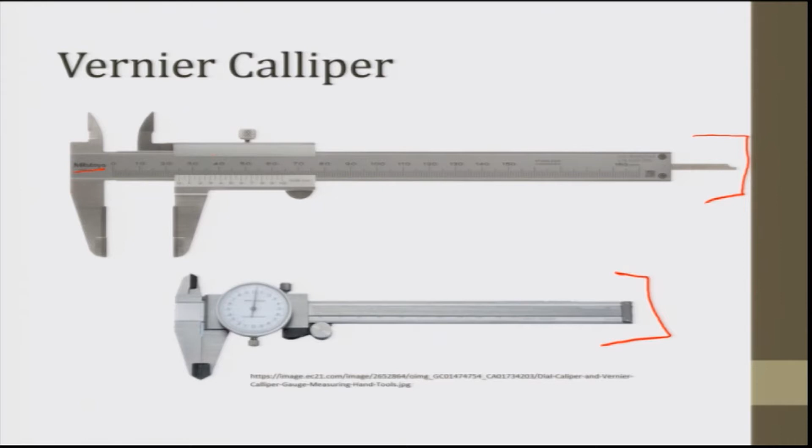The first instrument I will select here is the Vernier Caliper. These are the two Vernier calipers that we will discuss, both manufactured by Mitutoyo, Japan, and they have certain specifications. You can see the instrument here, it has various components.

This instrument has a main scale. The length of the main scale is about 12 inches. You can see it is calibrated up to 200 mm on the main scale. On the lower side it is actually 200 mm, however the length of the scale is even larger, to accommodate the other part, the movable part of the instrument, that we will discuss.

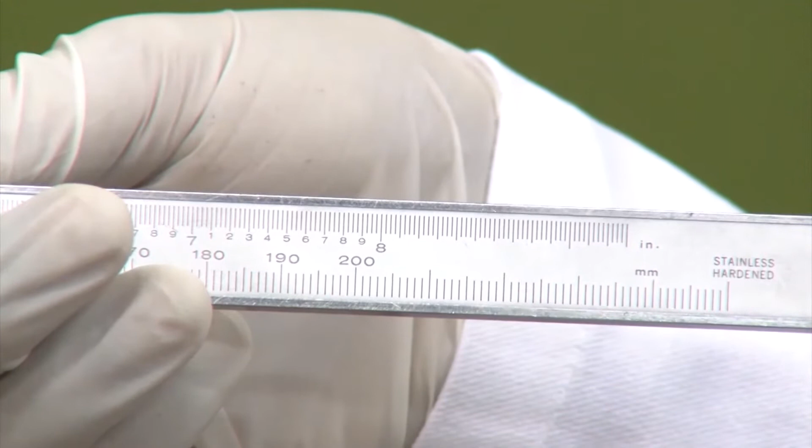On the upper side of the main scale we have the inch scale, calibrated up to 8 inches. However, there are certain other calibration lines that you can see here. The material of this specific Vernier caliper is stainless steel, stainless hardened steel.

It has various components as we have discussed in the theory as well. The first component is the solid L-shaped frame, which is actually fixed. It has two calipers on both sides, and there is another caliper that is movable.

You can see this solid frame here, in which we have two calipers on both sides. Actually there are two jaws. The jaws on the lower side are for the external dia - we can measure the external diameter of cylinders, spheres, or any body using the lower jaws. The upper jaws, which can be inserted into the cylinder, can be used to measure the internal dia.

If we close it completely, you can see the external jaws are also closed and internal jaws are also closed. When we open it a little, you can see these internal jaws on the upper side can be inserted inside, and the external jaws can hold the workpiece from the outside.

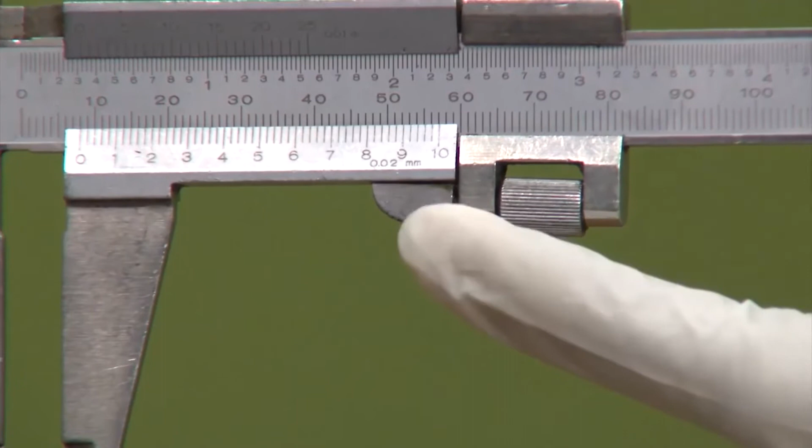So it has screws attached to it. On the lower side we have the fine adjustment screw, and on the upper side we have the clamping screws. How do we operate this? First we tighten the screw which is on the right hand side, and then using the fine adjustment screw we can adjust the distance of the Vernier scale.

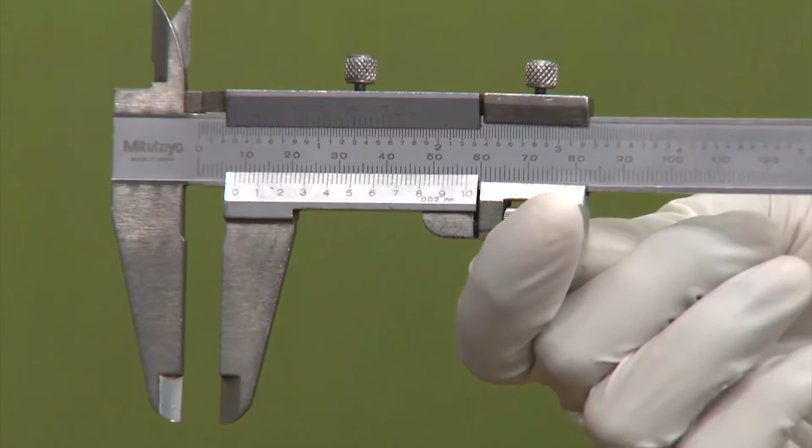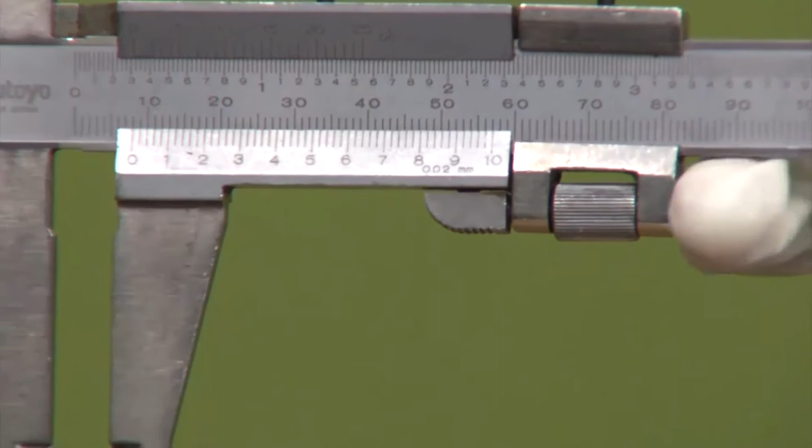The Vernier caliper is made up of either stainless steel or tool steel depending upon the nature and severity of the applications. It has engraved graduations which can be either forward vernier or backward vernier. This specific Vernier caliper that we have in hand is the forward vernier, so the reading starts from 0 to 10. Had it been from 10 to 0, it might be called a backward vernier.

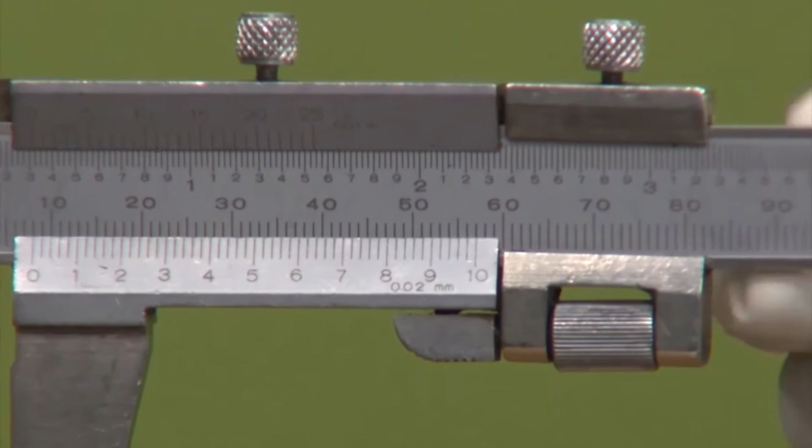The clamping screw enables locking the movable jaw in a particular position after the jaws have been set accurately over the job being measured. This arrests the further motion of the movable jaw. When it is locked using the clamping screw, the operator can note down the reading in a convenient position because the jaws would not move further.

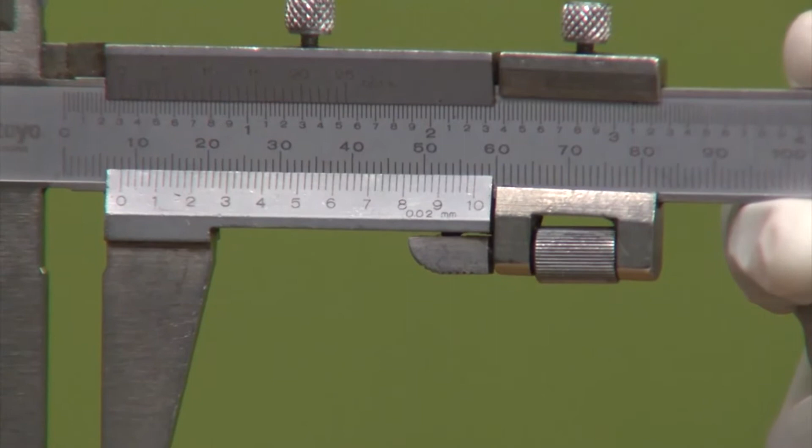The fine adjustment screw enables the operator to accurately enclose the portion of the job where measurement is required, by applying optimum clamping pressure. However, there are certain guidelines before using the vernier caliper. I would like to mention we need to clean the equipment, clean the vernier caliper or any equipment - this is a basic precaution or guideline used with instruments.

This vernier caliper is actually the analog or mechanical vernier caliper. We also have digital vernier calipers where we can adjust the zero at any position. We can say this is the zero position, and the zero can be adjusted because that is a digital scale.

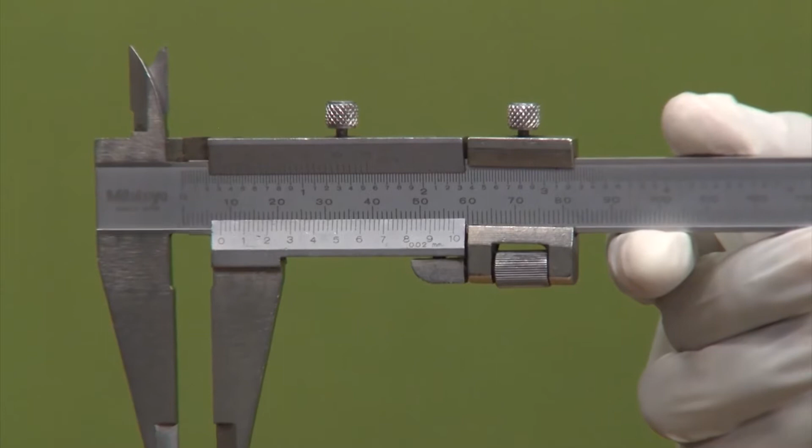But in this vernier caliper, we need to calculate the zero error if it is there. Deterioration happens due to small dust particles or tiny chips which can clog or come in between the rack and pinion arrangement of the vernier caliper, which can hinder it. So it is important to clean it properly.

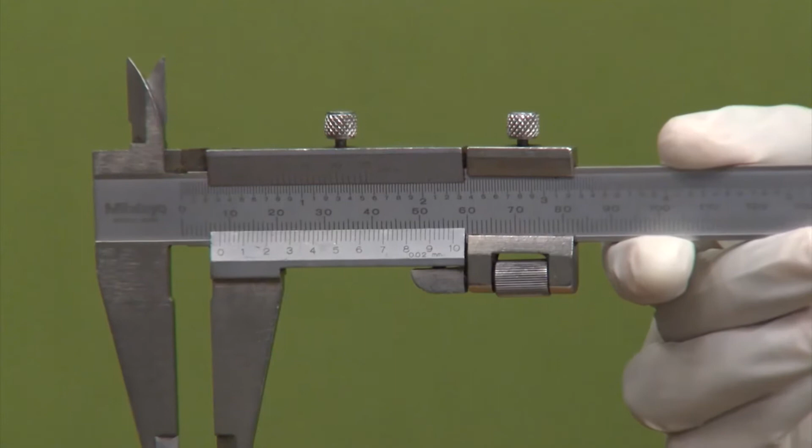The first part is I have to clean the jaws from this part because it is calibrated based upon this surface. This is a flat surface, and the flatness has to be up to approximately zero level. However, there is no actual zero level that exists, so it also has to be cleaned from here. We can use cotton to clean it using acetone.

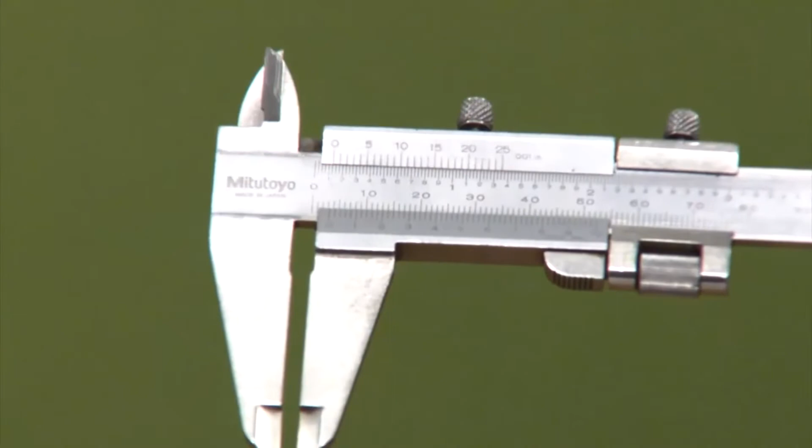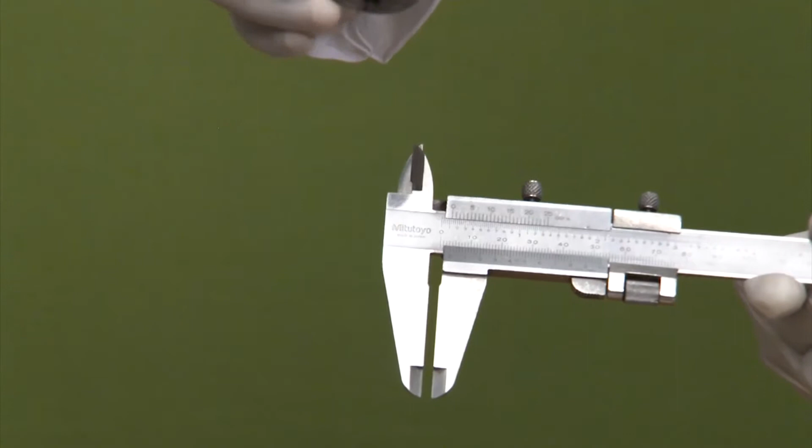So let us first clean the instrument and the workpiece. Now I have this cylinder for which I like to see the internal dia, the external dia, and also the height, or what we can call the width. I like to see these dimensions. Before that, while we are cleaning it, I like to just tell the guidelines.

When the caliper's jaws are fully closed, it should indicate zero. If it does not, it must be recalibrated or repaired. Now, loosening the clamping screw and sliding the movable jaw, altering the opening between the jaws is slightly more than the feature to be measured.

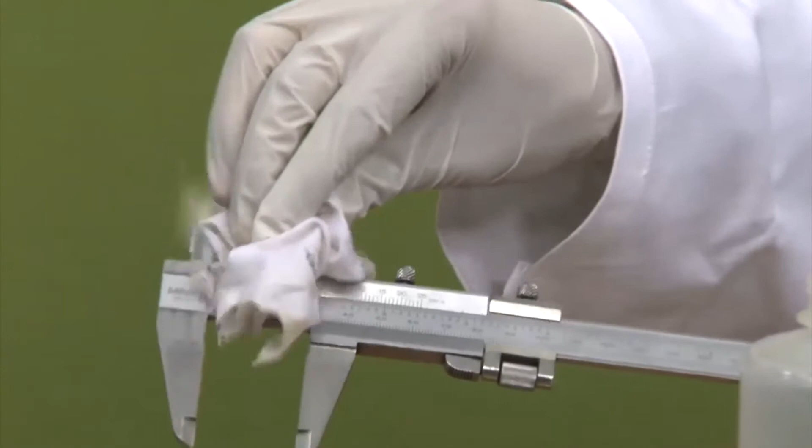So, let us clean first.

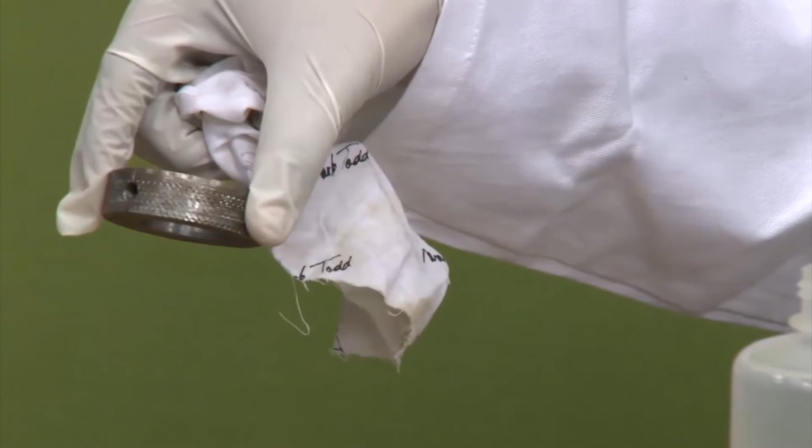So, the workpiece is to be cleaned now. We have applied a little acetone here.

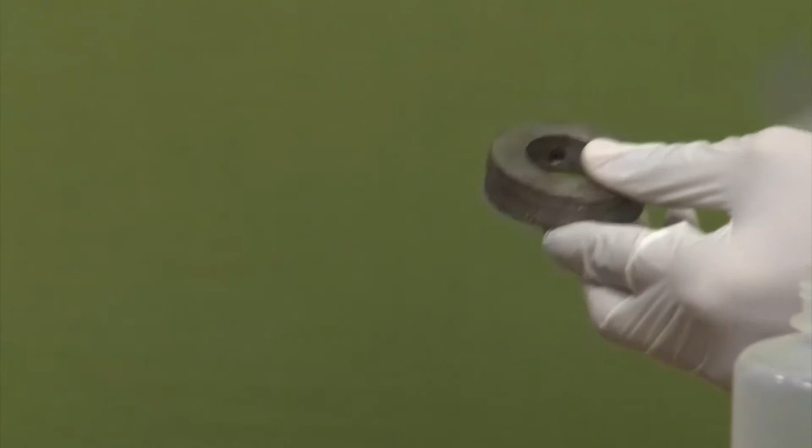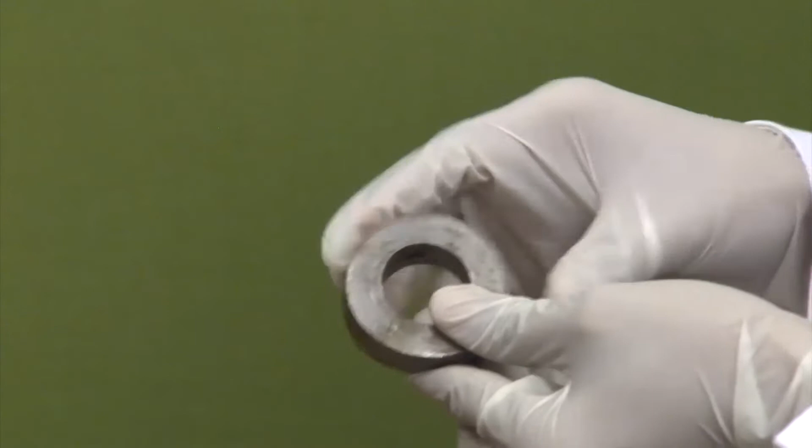So I like to first see the external dia. Also, not to forget, if we see the back side of the vernier caliper, you can see there is a straight probe. This can also be known as a depth gauge. If we open it, we can also see the depth.

We can see this is a probe, this is a scale. If we open it, whatever length it is getting opened, that is the length. That length can also be read on the vernier scale.

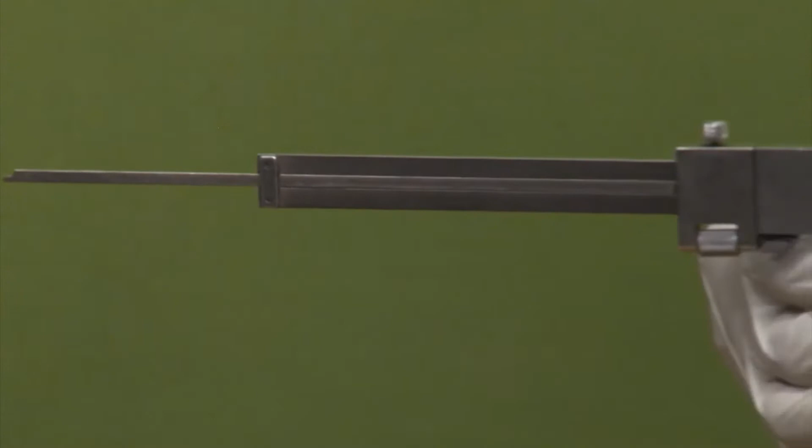So I will first explain the vernier principle, the principle of the vernier caliper. Actually, the vernier caliper was invented in 1631 by Pierre Vernier, who was a scientist, and this is the instrument which is, I can say, most widely used in industry. There are certain measurements that we can just do using the scale.

The main, the general steel rule - the least count of a steel rule is generally 1 mm, or sometimes 0.5 mm, where 1 mm is divided into 2 parts. But the vernier caliper permits up to 0.02 mm of least count. Least count is nothing but the minimum reading that can be taken using a specific instrument. So before checking the reading, I like to discuss the principle of the vernier caliper.

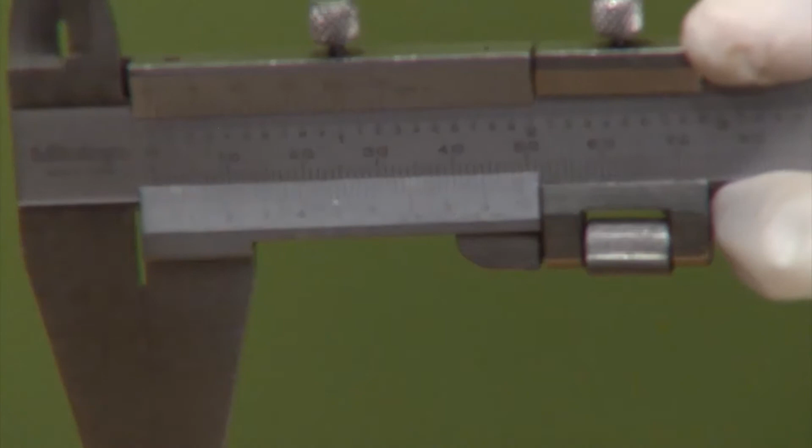So you can see that there are 50 divisions on the vernier scale. See, the numbers are from 0 to 10, between 0 to 1 there are 5 divisions, between 1 to 2 there are 5 divisions, between 2 to 3 there are 5 divisions. If I continue this, it is 5 divisions into 10 times, it becomes 50.

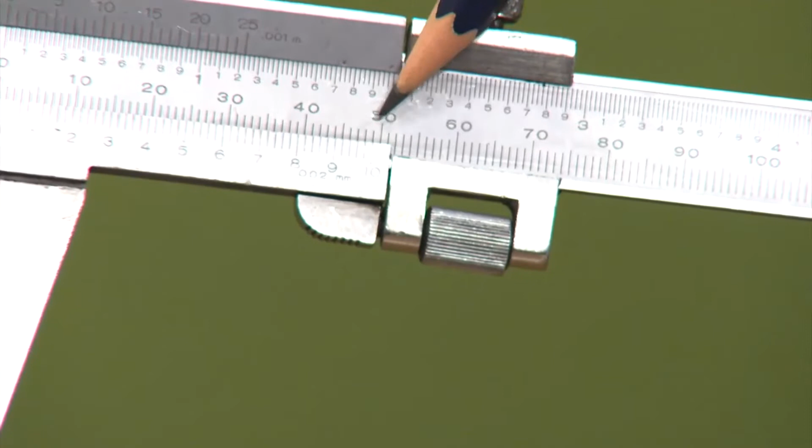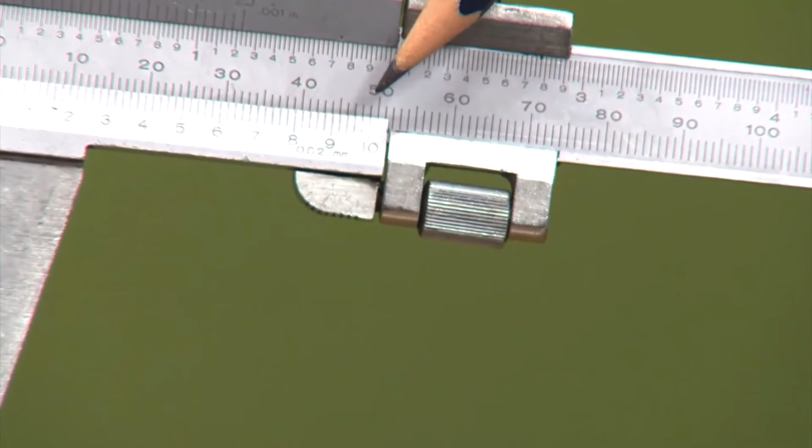So the 50th division of the vernier scale, the lower scale, is matching with some reading on the main scale. You can see that the last reading on the vernier scale is coinciding with which reading of the main scale - the 49th. If you see the divisions between 40 and 50 on the main scale, it is one reading ahead of the 50, it is the 49th reading - the last reading on the vernier scale is coinciding with the 49th reading of the main scale.

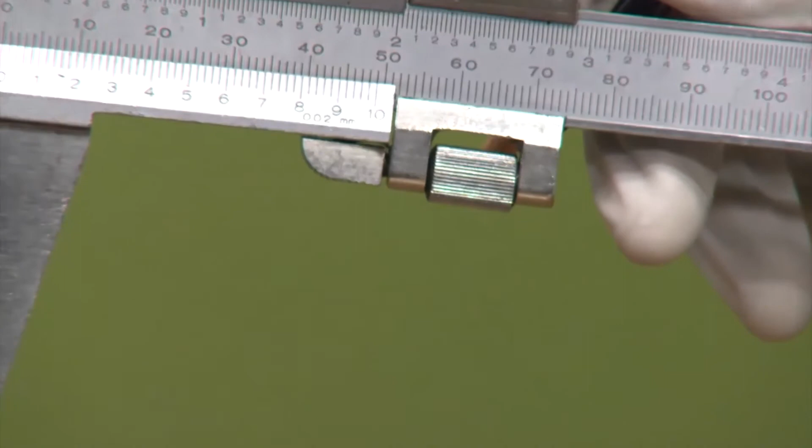If this coincidence is there, this means the zero is perfect, there is no zero error. So this is actually 49 to 50. I will like to explain this principle by using a more simple calculation.

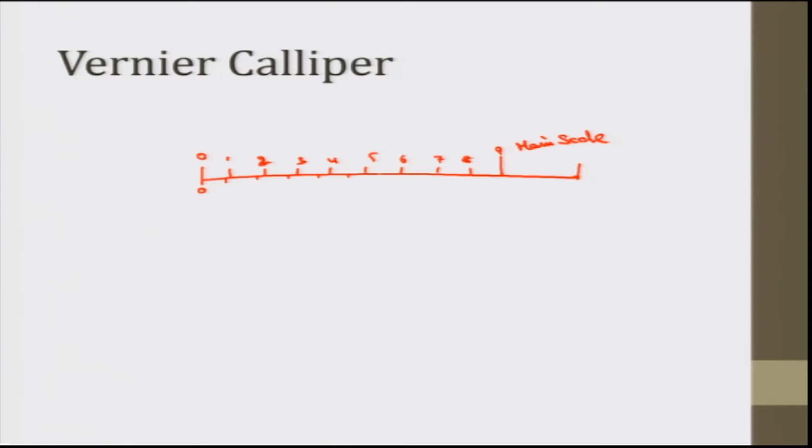So let me say there is a scale in which we have 9 divisions: 0, 1, 2, 3, 4, 5, 6, 7, 8 and 9. These 9 divisions I will call the main scale. And there is another scale which has 10 divisions: 1, 2, 3, 4, 5, 6, 7, 8, 9 and 10.

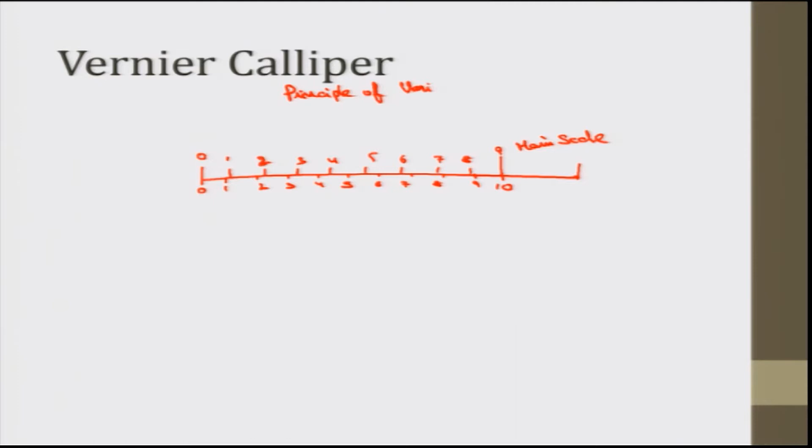I can better call this the principle of Vernier caliper.

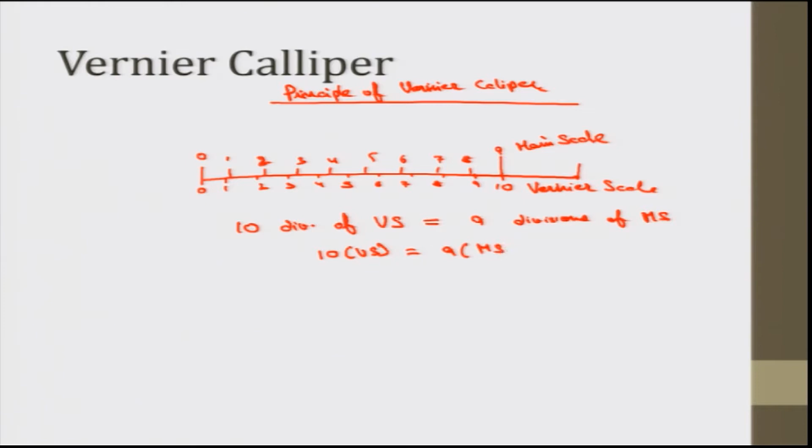So what is happening? These 10 divisions of the Vernier scale, I will call it Vs, is equal to 9 divisions of main scale, which implies 10 into Vernier scale equals 9 into main scale, which implies Vernier scale equals 9 by 10 of main scale equals 0.9. That means Vernier scale is equal to 0.9 times of main scale.

That means one Vernier scale division is equal to 0.9 main scale divisions, or this is equal to 0.9 mm.

What if this number is 49 here and this number is 50 here in the present scale? That implies Vernier scale equals 49 by 50 of main scale. That means one Vernier scale division is equal to about 0.98 main scale divisions, equal to 0.98 mm.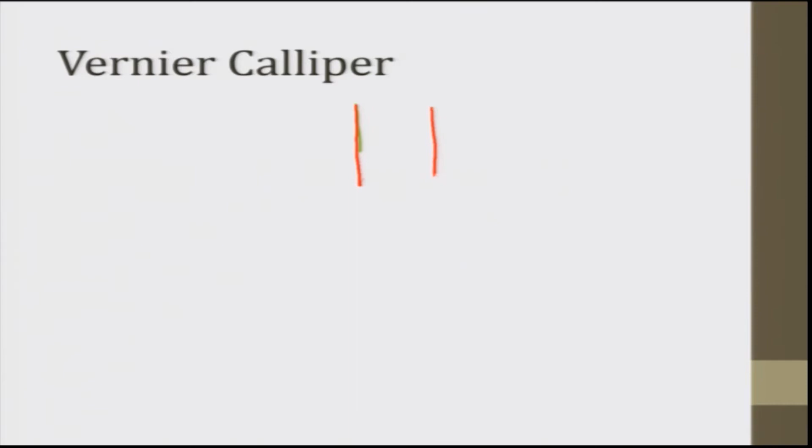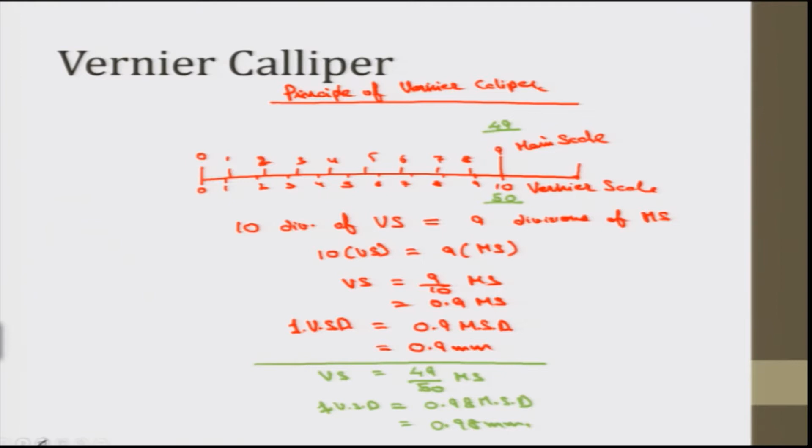So what does this get us to? This implies that if I see the first division, if this is the main scale, and this is our Vernier scale below, if this is 1 mm, this first division and this value - you can say one Vernier scale division equals 0.98 mm, which means this value is 0.98, and this value is equal to 0.

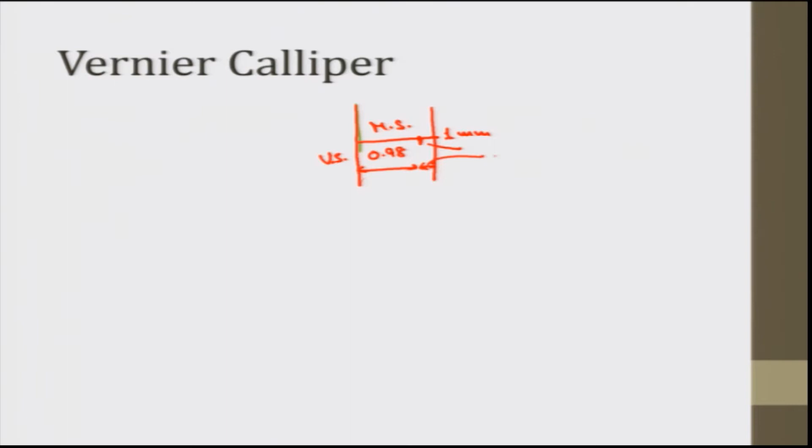Or I can better calculate it this way: total 1 minus 0.98 is equal to 0.02 mm. That is, the first reading is 0.02 mm.

Now if the first reading is 0.02 mm, what would be the second reading? It would be 0.04, 0.06, 0.08, and so on up to 0.02 into 50, that is equal to 1 mm.

So these are the divisions which our Vernier scale has. So when we see which point is coinciding, we need to see the point that is coinciding - that gives us how many divisions ahead of the main scale division our Vernier scale is. We will do certain measurements here and that will make it more clear. Also here we need to adjust it for the zero.

Now this gives, because this is the least count, I can say that in general n Vernier scale divisions is equal to n minus 1 main scale divisions, which means 1 Vernier scale division is equal to n minus 1 by n main scale division. This gives us the least count.

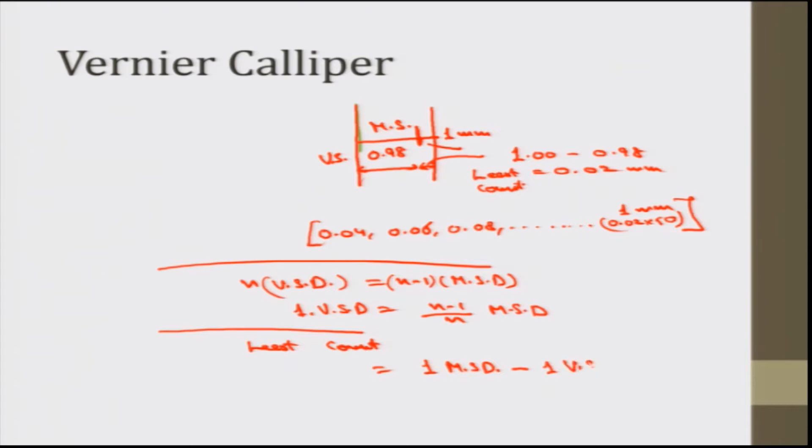That means least count is equal to 1 main scale division minus 1 Vernier scale division. This is known as least count, which is equal to 1 main scale division minus n minus 1 by n Vernier scale divisions, which is actually equal to 1 by n of the main scale divisions. So this is our least count, the formula for the least count in general.

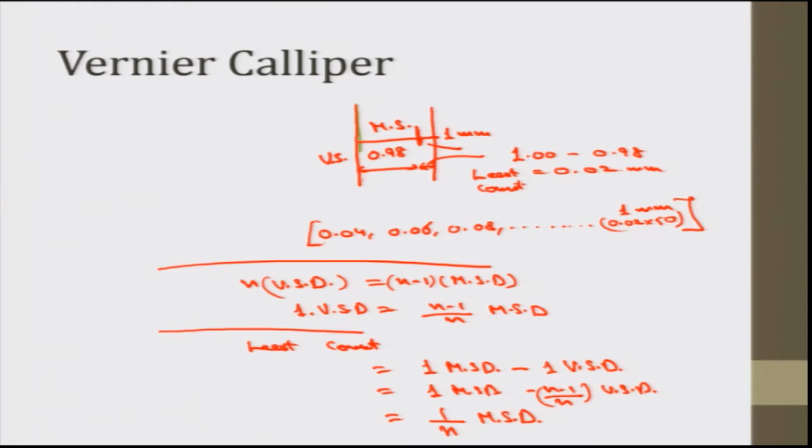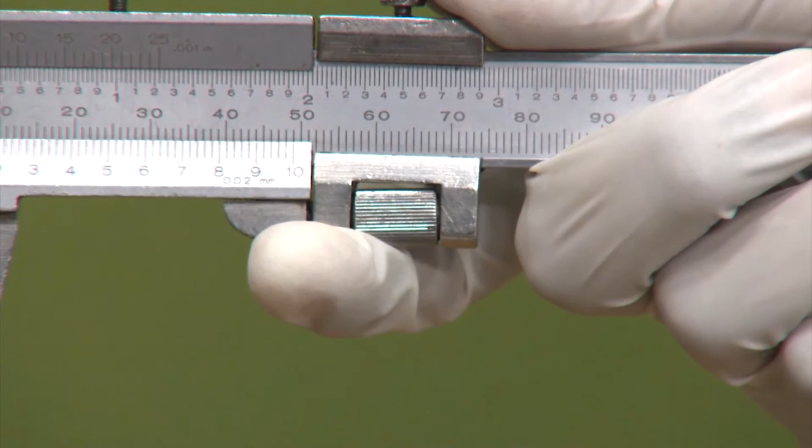So let us try to see the dia of the cylinder that we have. Let us first try to see the external dia. Now we will see the external dia of this cylinder. One thing is we can just use the main scale, the steel rule, to see the measured dia, but the accuracy or least count there would be 1 mm. Let us see up to the second place of decimal and only even numbers, that is 0.02 least count, what is the external dia of this.

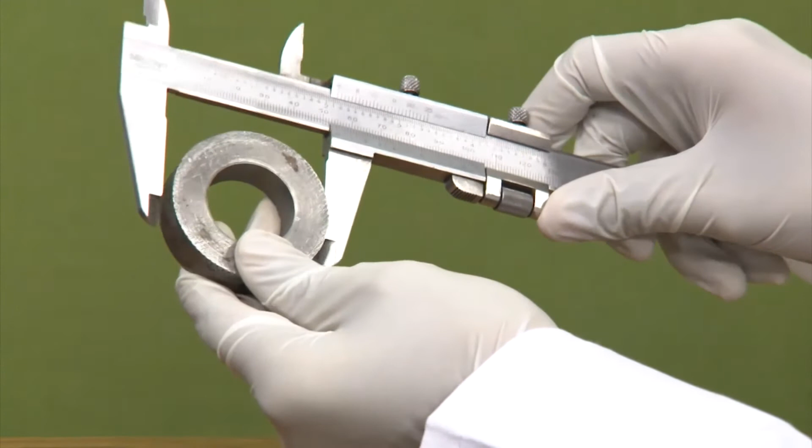See, we are using the finger lock to see. First we will lock the clamp in which we have the adjustment screw, then we will use the fine adjustment screw to put the pressure.

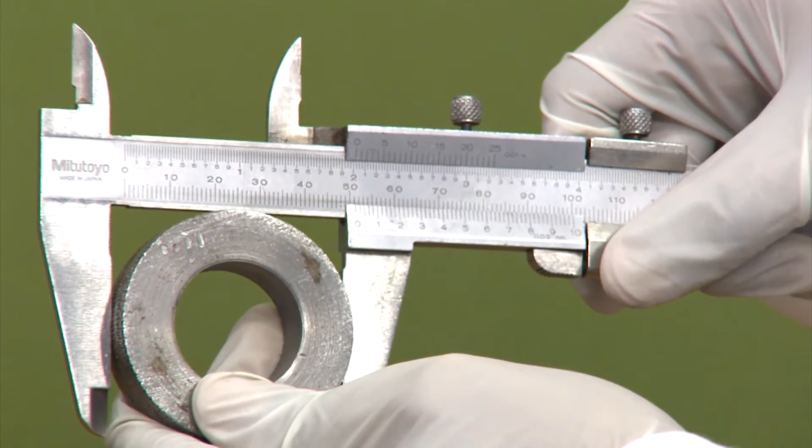So the way to do it is, when we loosen the clamping screw and slide the movable jaw, altering the opening between the jaws slightly more than the feature to be measured. Here the feature to be measured is the cylinder. We open it a little more than that, then hold the feature in the jaws, then place the fixed jaw in contact with the reference point.

This is the way we open it a little more than the feature to be measured, then place the feature, that is the cylinder, to the fixed jaw. It is placed to the fixed jaw. Now the movable jaw is taken close. Now we clamp the screw.

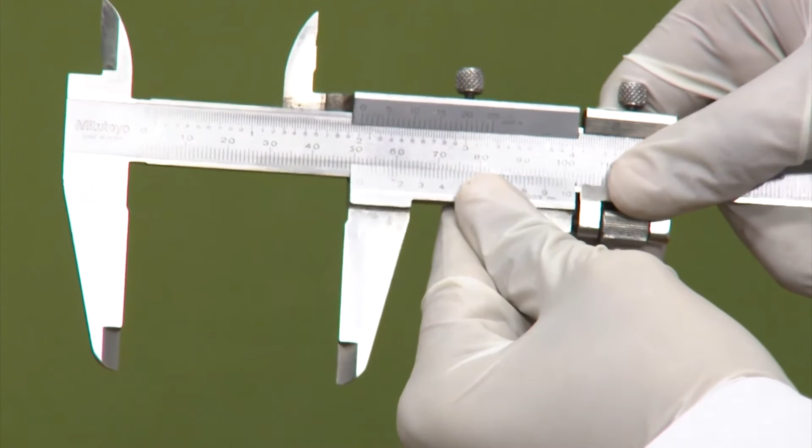Now using the fine adjustment screw we can apply a little pressure. Now we tighten the clamp screw on the movable jaw without disturbing the light contact between caliper and jaw. Then we will tighten the screw. Then we will remove the feature. Now because both clamping screws are locked, we can very conveniently see the readings.

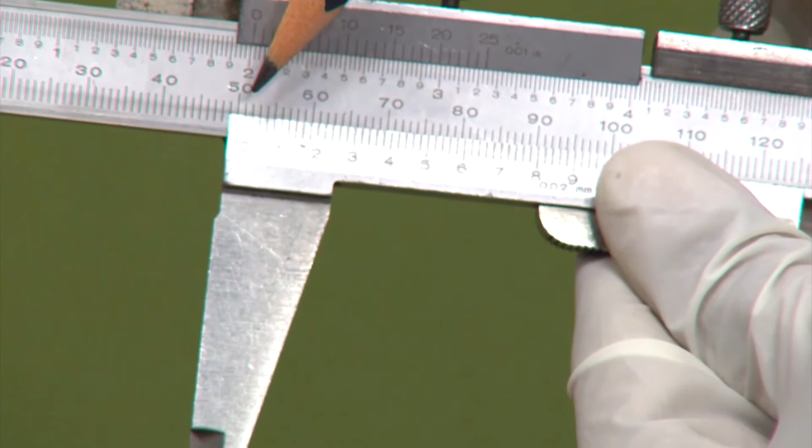Now to see the readings, let us see what is the zero. Zero of the Vernier scale is matching with 51. Actually it is not exactly matching, it's a little forward than the 51st division, so it's about 51, and we will see which reading is coinciding. Actually this is a close look, we have to be careful.

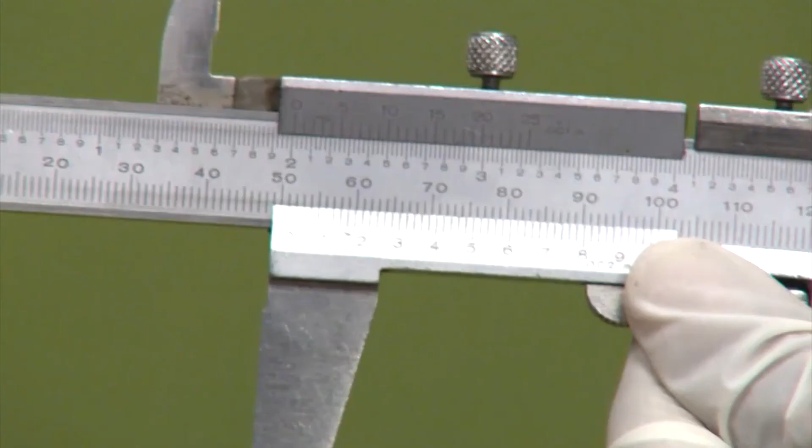The best coincidence here is reading number 4. Between 0 to 1, the 4th reading is coinciding, which means the dia of this workpiece is equal to main scale reading plus least count into the coinciding Vernier scale reading. So that is equal to main scale reading 51 plus least count 0.02 into 4th reading, which is equal to 51.08 mm. This is the external dia.

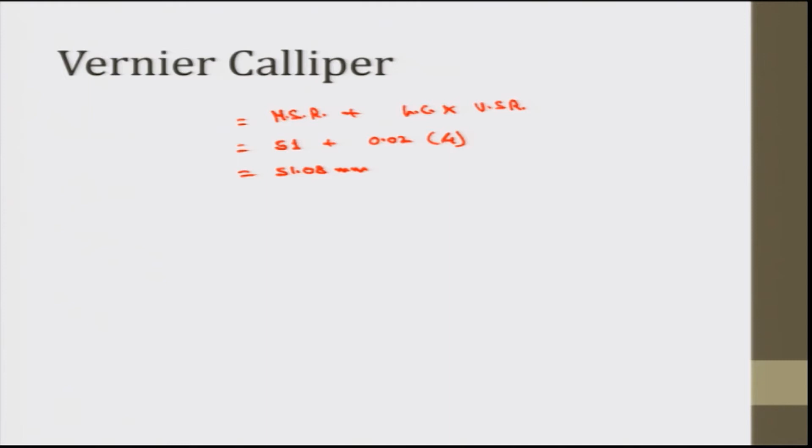So actually when we do the calculations, when we do the measurements, it is not done only once, as we will discuss in statistical aspects of metrology. No reading is taken only once. Generally we do not trust a single measurement, we do multiple measurements. So we will check the dia at some other location as well.

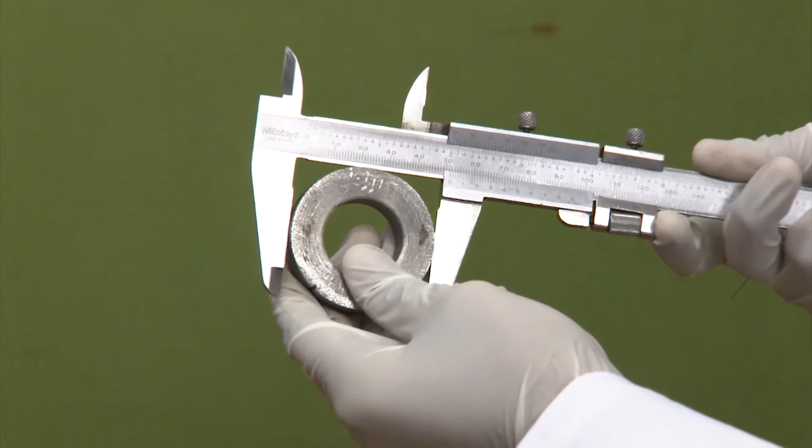Again the same procedure: opening, moving it to the fixed jaw, then closing, locking the clamp, then fine adjustment screw, a little pressure so that we can remove it properly. Now let us see the readings again.

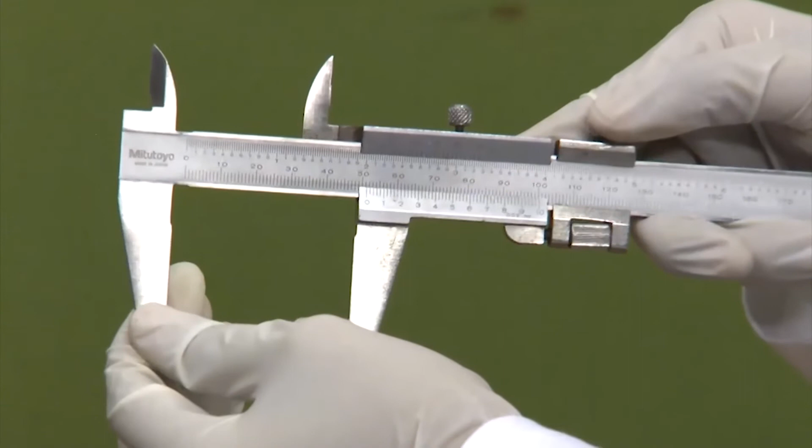It is about 51, the main scale reading is again 51, this is observation 1. For observation 2, the main scale reading is 51 plus least count into vernier scale reading. Let us see which vernier scale reading is coinciding. If we see it closely, the 9th reading is coinciding.

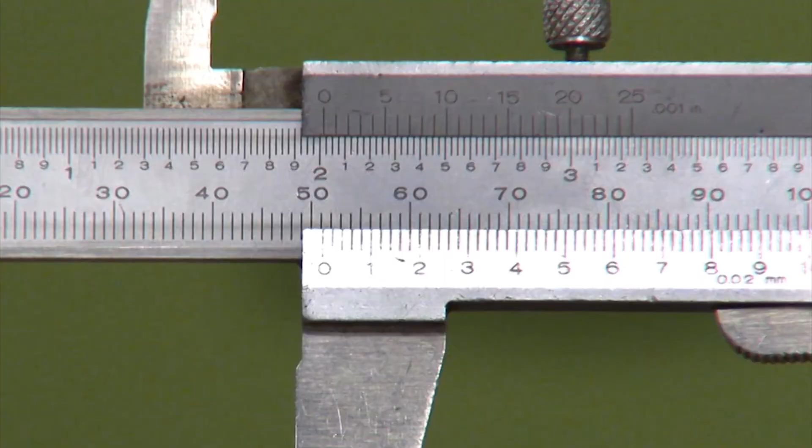So it is the 9th reading, which is equal to 51 plus 0.18, equal to 51.18. So you can see that the two observations have a difference of 0.1 mm.

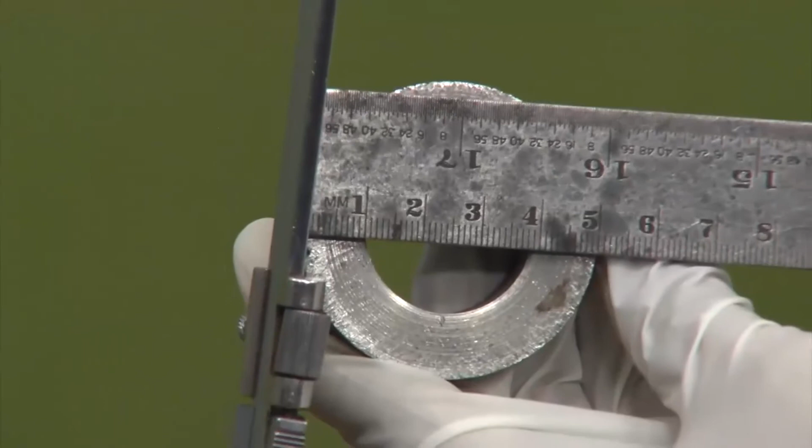When we see it using a generally available scale, the reading we can see is just, I think, 51 only. The dia actually has to touch a reference plane here. Touch it. The dia is about 51.

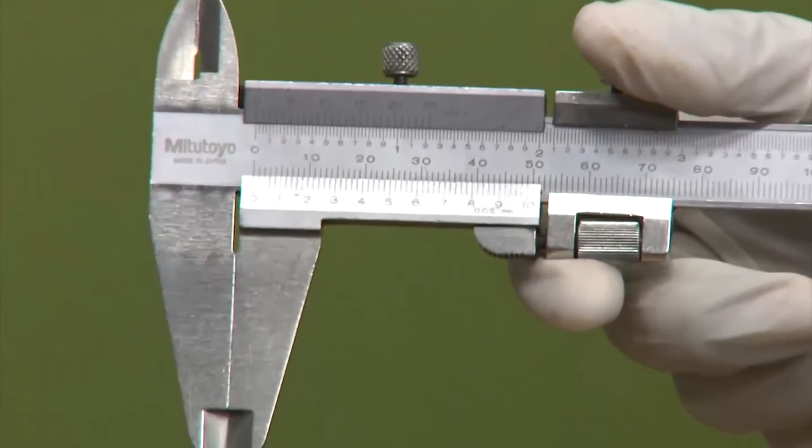So the thing is this difference, 0.08, 0.18. We can do multiple observations using this and take an average. For instance, if I take only these two readings as my final observations, the final dia of this workpiece would be: 51.08 plus 51.18, divided by 2, average is equal to 51.13 mm.

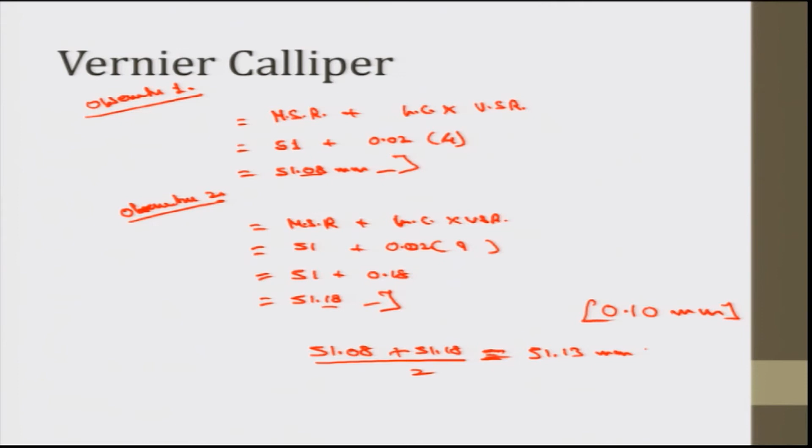So why is this dia different? This workpiece, can we see why this difference, this error, is there? If we see this workpiece closely, you can see that on the external portion we have these serrations, this is actually knurling that is done here. Because of this knurling there are ups and downs, crests and troughs, peaks and valleys.

Because of this, at different locations the dia comes out a little different. This is quite sensitive to our Vernier caliper, which has a least count or sensitivity equal to 0.02 mm, and is able to identify this difference. This difference, based on these two divisions, is of the order of 0.1 mm that I have just written here.

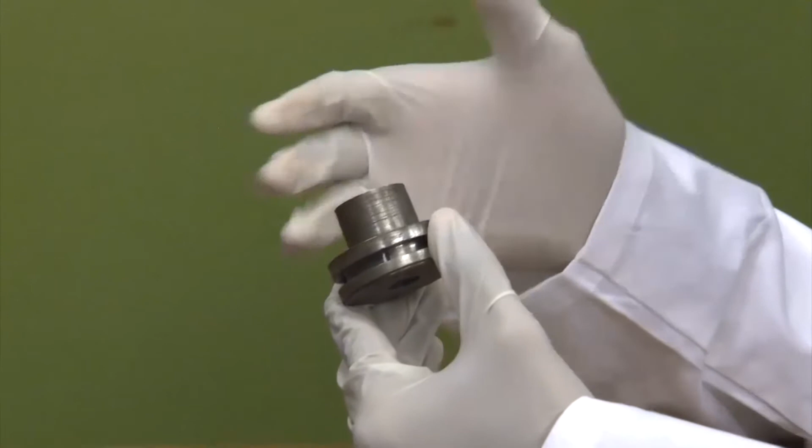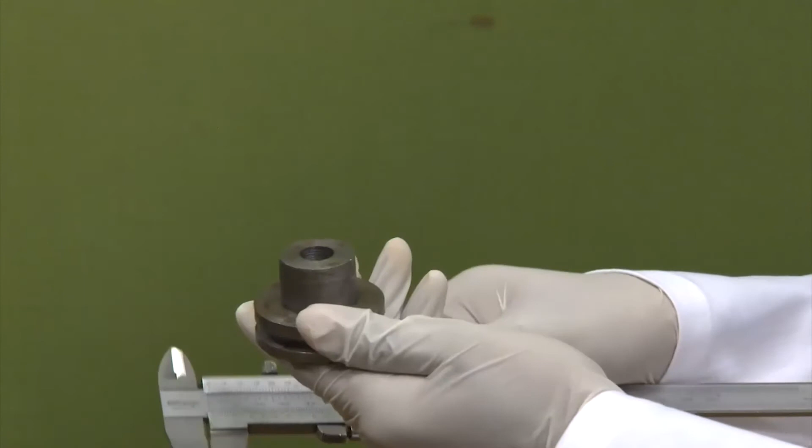So also we can see the internal dia. I will pick another workpiece here, for which I will use all the jaws - the depth gauge, the internal, external - to draw the full drawing and identify all measurements and dimensions of this workpiece. I can see this workpiece has various portions: it has a small cylinder, a big cylinder, and a slot in between.

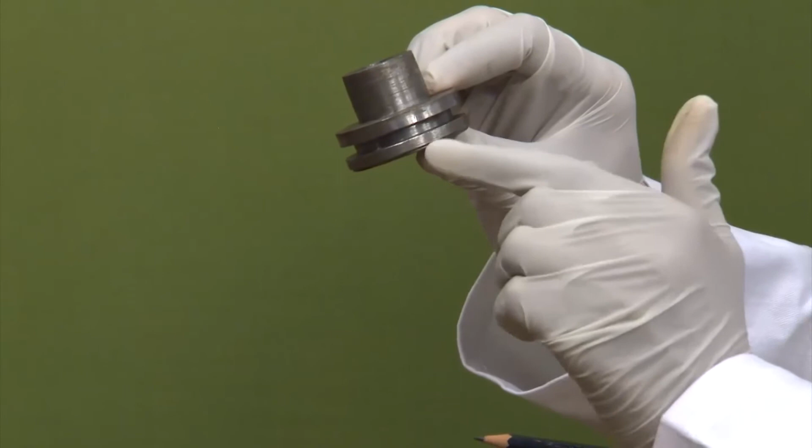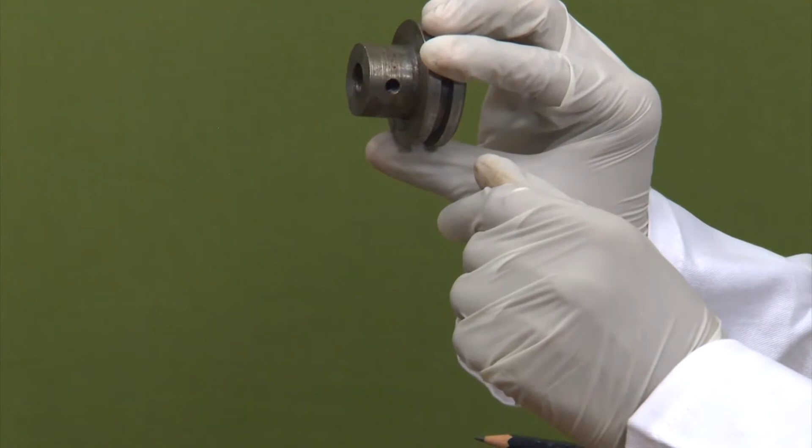Then we have a small hole on the upper side, actually this is a through hole, and also we have a thread hole, a keyhole that is also a thread. There are internal threads here. Let us see all these dimensions. Could I draw the drawing of this? Could I get the specifications and make the drawing of this component?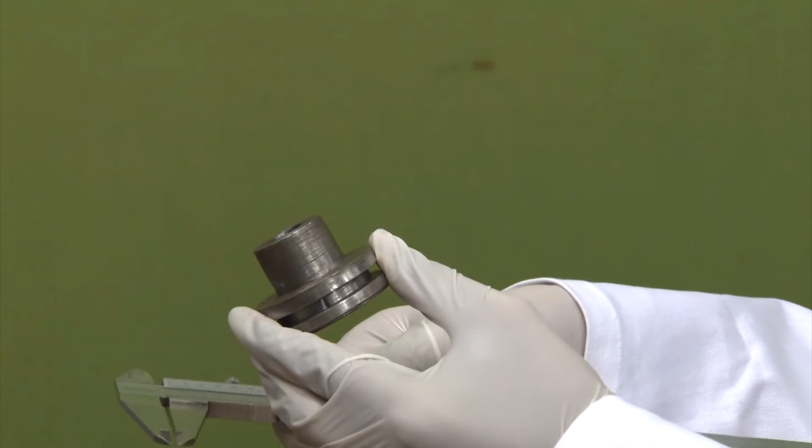Let us see, so it is this kind of component. I will make the drawing while we see the dimensions. Let us see the external dia of the bigger circle. Using the same procedure, I will just note the reading that is coinciding and not show the calculations directly, to save time.

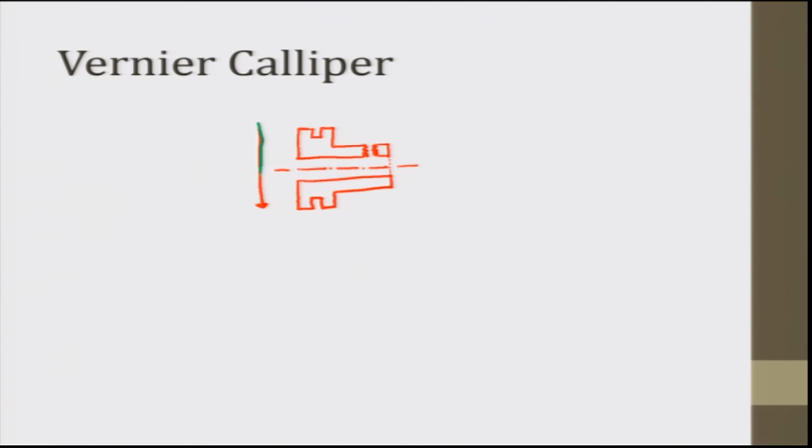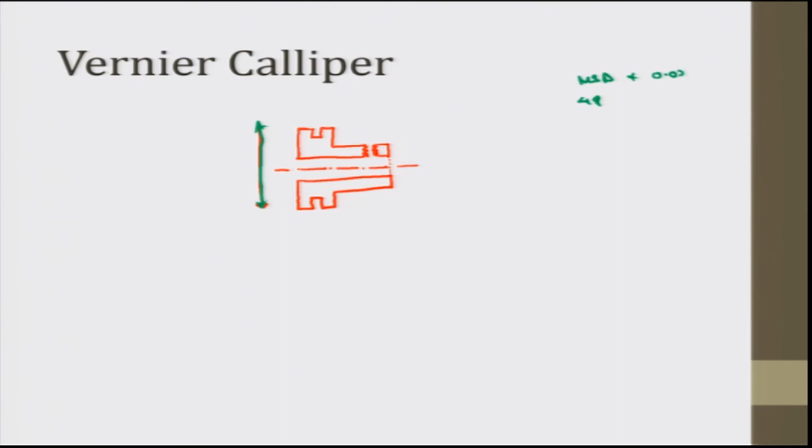So the external dia here, on the Vernier caliper, the approximate reading is this dia, let me call it capital D. Let me choose a different color for dimensioning. It is 49. I will use main scale division plus 0.02 into Vernier scale division: 49 plus 0.02 into 11 - you can see the 11th reading is coinciding here. So this is 49 plus 0.22, equal to 49.22. I will put this value here.

So up to 2 places of decimals and even numbers, we can see all these dimensions. This dimension small d is there, then small t, capital T and T dash, and also we can see this small dia, let me call it S.

So we will put all these calculations and provide you with the notes. This was actually the purpose of this demonstration, to show you the principle and use of the Vernier caliper. This Vernier scale is not only used in calipers, it can also be used in a height gauge, which is one of the instruments we will use for demonstration further.

Now there are certain precautions when we use the Vernier caliper, some general and some specific to this caliper. The first precaution is the measuring force. Do not apply excessive force to the workpiece. Excessive measuring force will develop measurement errors because of positional deviations of jaws. So, no excessive force.

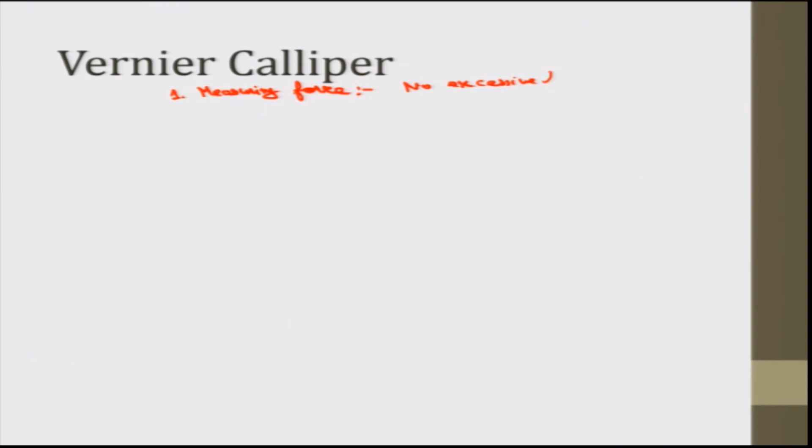It can lead to positional deviation errors.

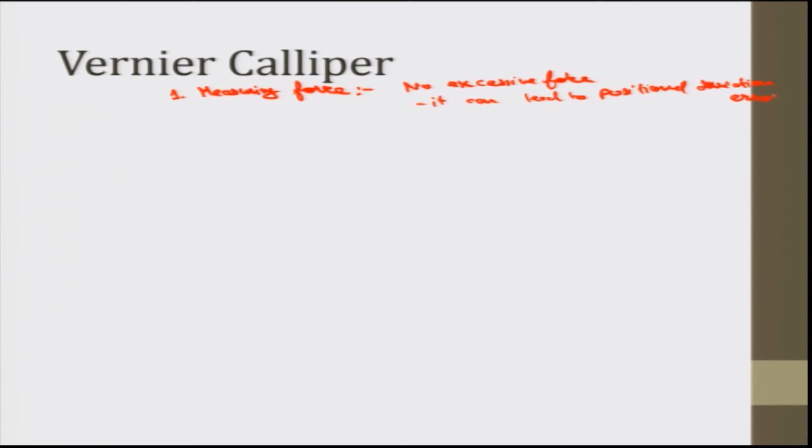Number 2 is the observer error, that is parallax error. However, the instrument is quite clear, we can see which Vernier scale reading is coinciding with the main scale. But in general, parallax error could come. Not in Vernier caliper specifically, but in general it is avoided. This instrument is not that sensitive that parallax error would be significant here, but it is an important error. If it comes, it can give us a difference of at least 1 reading.

Number 3 is the outside measurement. We can put the workpiece as close to the reference surface as possible and have the measuring faces fitted with the workpiece, because the outside measurement, if not put in a proper way, can give us some error.

Inside measurement also has similar kinds of drawbacks. So in inside or outside measurement, it is important to note the maximum reading and the smallest reading, maximum and minimum. Take both readings at least, if possible.

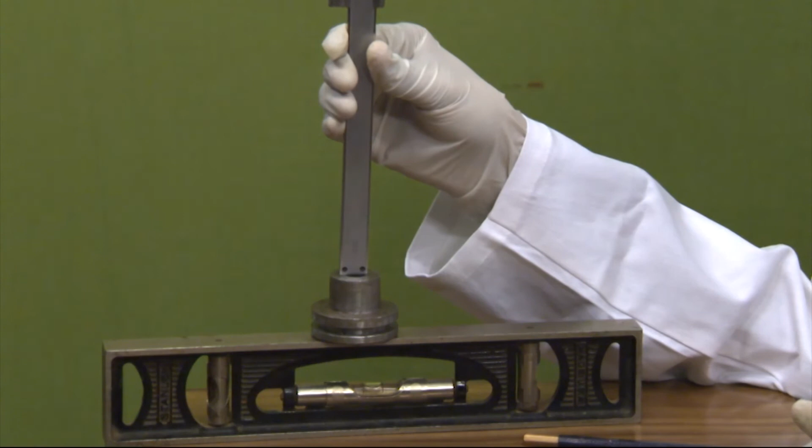The spirit level is also smoothened, it is ground properly. The ground is 1/10,000th of an inch, this much sensitivity, this much smooth surface is there. So we have inserted the depth gauge in this, made it touch the base. Now we can note the reading. While using the depth instrument or depth measurement, there are certain precautions, like setting the depth bar perpendicular to the measured surfaces.

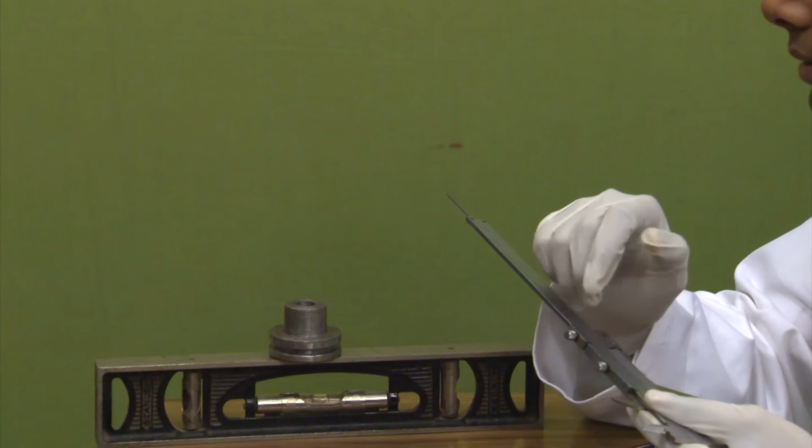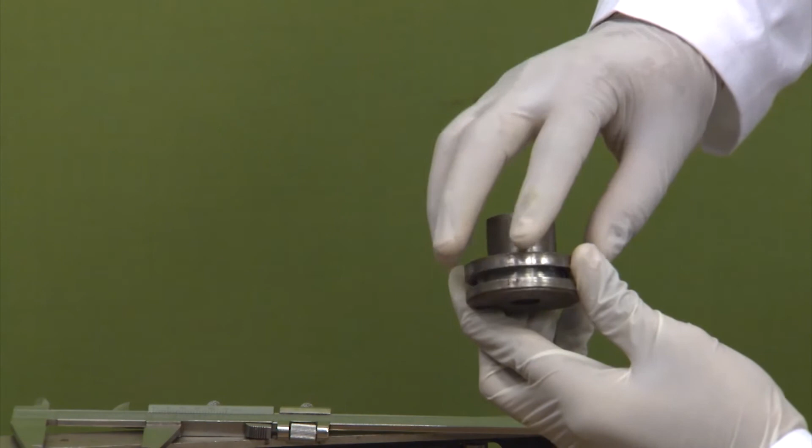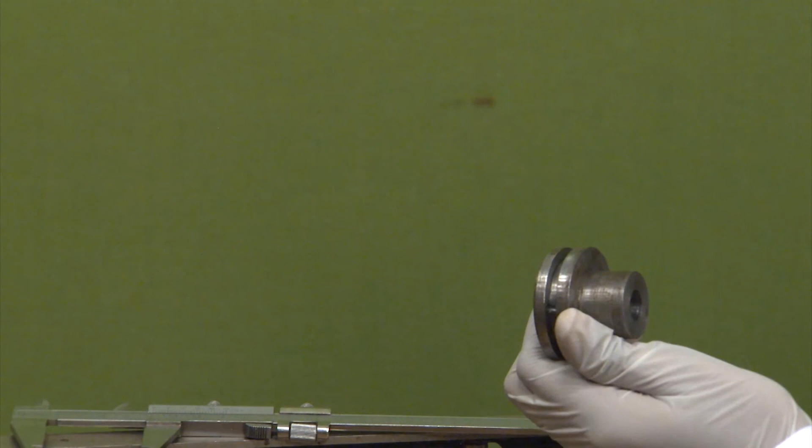Also we can do some step measurement. In step measurement, we have the step measuring face fitted with the measured surfaces. The step measurement can be like we have a groove in the workpiece, this can also be called a step. So we have a groove here, we step down, then we come up. Actually this die is the same and this is a step. So in step measurement it has to be closed, then positional error could also come, you have to be careful about that.

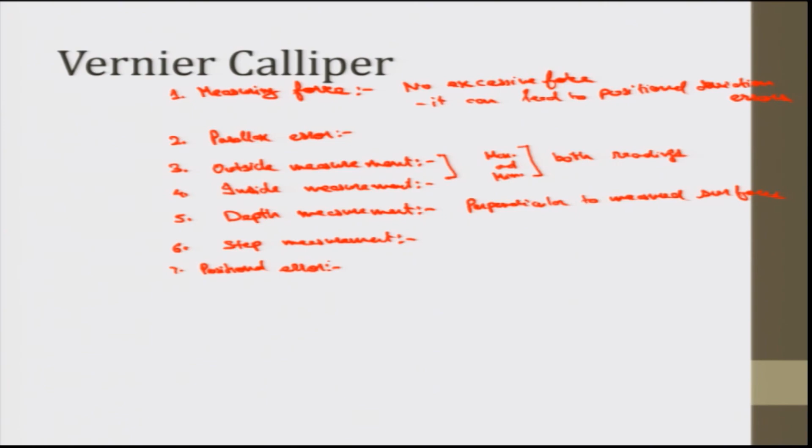So for the depth measurement, the main scale reading is 41 and the Vernier scale reading, it is actually T plus T, this is the total. This is 41 plus 0.02 into 7, the 7th read is coinciding, it is equal to 41.14 mm.

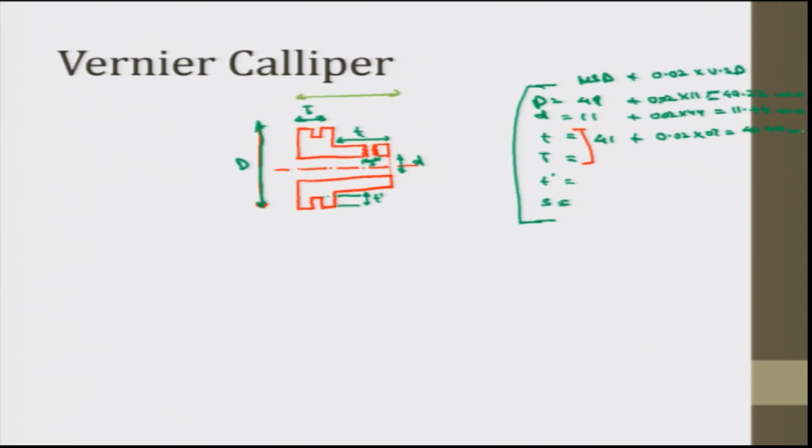So this is our Vernier caliper. We also have another Vernier caliper; in this one also we did not have any zero error. Had it been the zero error, we would have to add or subtract that. Sometimes the zero is not coinciding, sometimes the reading is forward or backward, so it is not coinciding and we have to adjust it accordingly.

Whenever it is forward, it would mean the reading is a little larger. When the jaws which are closed are open a little, this is known as positive error. So whatever reading we get, for instance if I get reading 50.20 and this error is 0.10, this 0.10 is something that is added to it, so we need to subtract that. This positive error has to be subtracted, and if it is an overlap, that would be a negative error, which has to be added. So we have to adjust for the errors.

To deal with the error, so that the zero error does not occur, we have the dial gauge and the dial Vernier. I will first discuss the dial gauge, then the dial Vernier. Also, there are digital Vernier calipers in which we can set zero at any point, which can also deal with a zero error. So this was the Vernier caliper. In the next part of the lab demonstration, I will discuss the dial gauge and the dial Vernier, then we will move to the micrometer. Let us meet in the next part of the lab demonstration. Thank you.